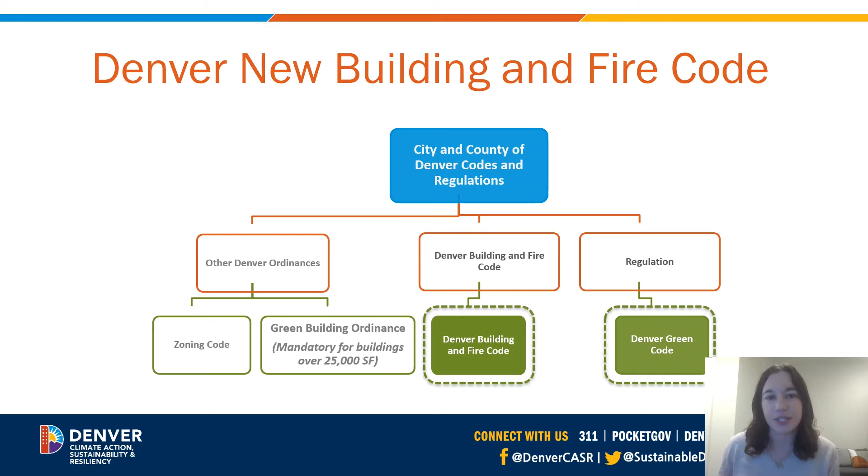Through the end of January to the middle of May, there will be technical advisory committee meetings that will be ongoing to hear and make recommendations to approve or disapprove proposals. Those will be published and be sent to City Council for recommendations of proposals, and there'll be a briefing and a vote. And if that's approved by City Council, then that will create the 2022 Denver Building and Fire Code.

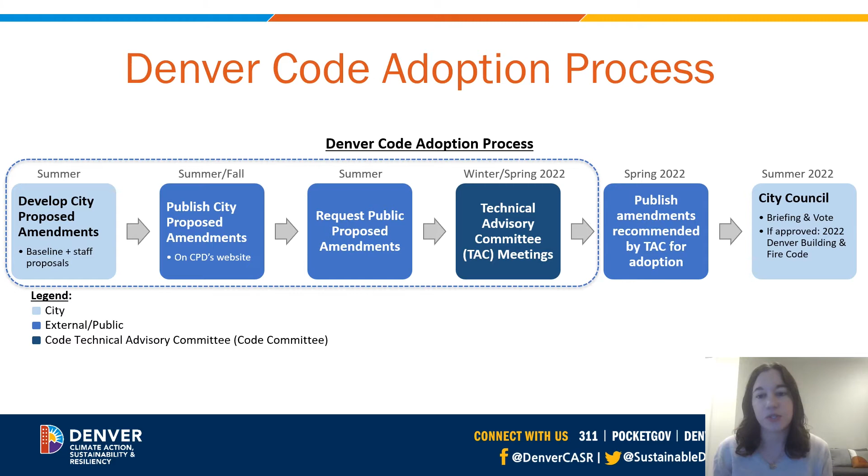For the Code Committee structure, the committee hearings will be with Community Planning and Development. There will be 6 committee hearing series. First one being the International Building Code and International Existing Building Code, the International Fire Code, the International Residential Code, the International Mechanical, Plumbing, and Fuel Gas Code.

And what these briefings will be focused on is the International Energy Conservation Code and the Denver Green Code Energy chapters. That will be one series. And then the Denver Green Code non-energy chapters will be another series. There'll be 15 to 30 voting members of each committee series. NORESCO is Denver's code consultant, and they will be facilitating these meetings.

They are open to the public to listen or to be a proponent or opponent. They will also be following Robert's Rules of Order, where a proponent speaks. Then there'll be speakers in support of the proposal and then speakers in opposition.

Then the committee has a chance to ask questions, where there will be a rebuttal in support and then a rebuttal in opposition. And if necessary, there'll be floor modifications and then eventually getting called to a vote. And the committees will be voting to recommend approvals of proposals. And the agendas for the committee hearings will be posted 5 days ahead of the hearing, and the minutes will be posted 5 days after the hearing.

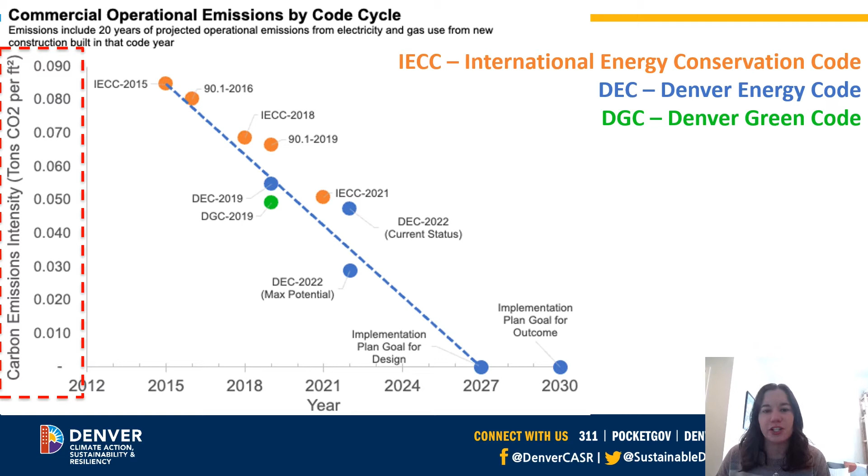Many of you have probably seen a chart like this showing the progression of the various codes and how they compare to Denver's goals. It's based on carbon intensity instead of energy, so the relationship between the codes might look different from similar charts. The carbon is cumulative carbon intensity over a 20-year lifespan, the anticipated average equipment life of new equipment. The carbon intensity takes into account the projected decarbonization of Xcel's electricity grid. This allows us to graph the impact of efficiency, electrification, and renewable energy proposals all on one graph.

This chart includes the ultimate goal for Denver from Denver's Net Zero Energy Implementation Plan. But keep in mind that this is the overarching goal for the actual performance of buildings. But we are talking about the Energy Code, which primarily addresses the design of buildings rather than the actual outcomes. And we know that there's a divide between the Energy Code and the actual performance in buildings. In 2024, Denver will be adopting policies to address actual performance outcomes in buildings in order to bring actual performance into alignment with code expectations.

So the goal is for 2027 code to require net zero energy for design through traditional energy code requirements, and for actual performance to start achieving net zero energy in 2030 through the addition of outcome-based policies to work with the energy code. But always keeping in mind that this is about code vintage. Because of permitting and construction timelines, buildings permitted under the 2022 will continue to be built as late as 2027.

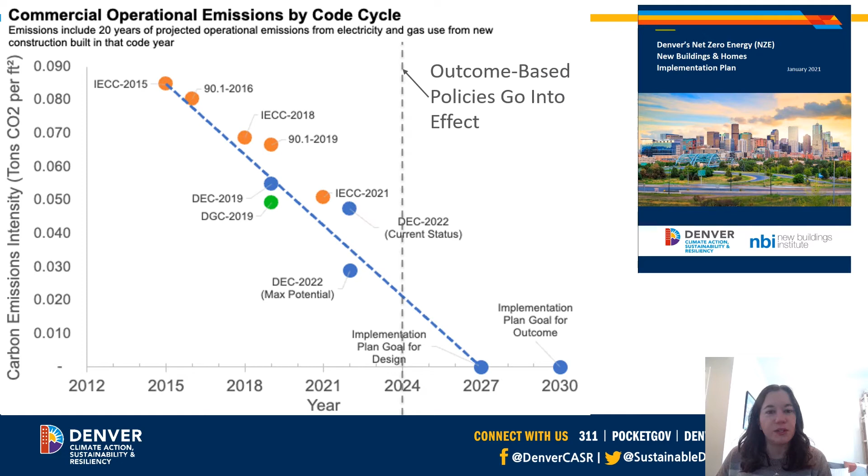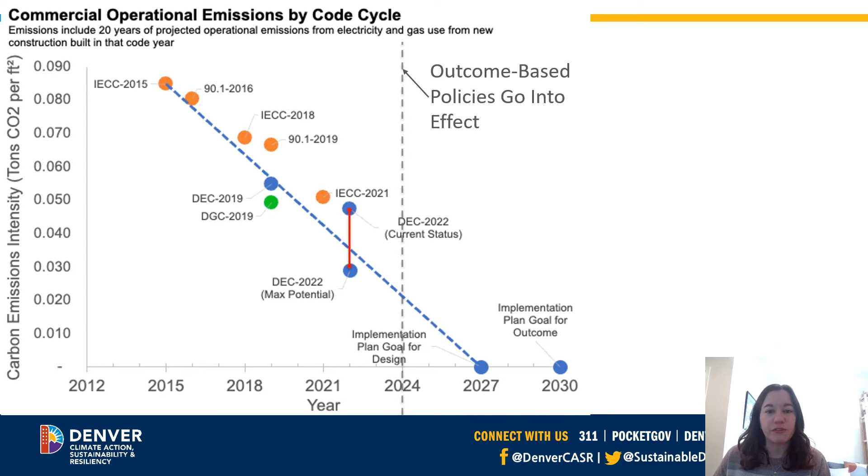This chart includes 2 points for the 2022 Denver Energy Code. One represents the maximum potential of all the proposals that have been proposed, and the other shows where we are with the proposals adopted so far after the first hearing. So we can see that we have the proposals we need to meet Denver's goal. This is all based on estimates of the status of Denver's codes and the impact of the proposals. And some proposals have modeling to support saving potentials, but for most of them, the impact had to be based on best estimates by our consultants, NORESCO and NBI, since hard savings or electrification impact numbers weren't available.

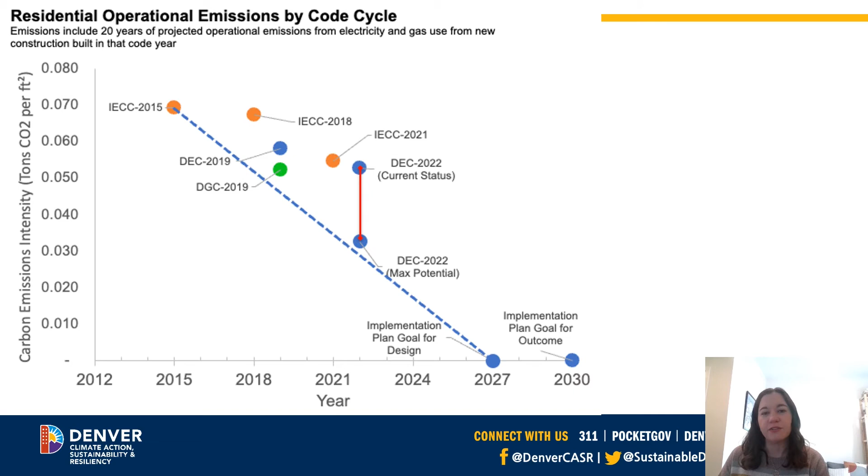When we look at the same chart for residential, we can see that even though the line is not as steep, the national model codes have not made the same kind of progress in the last few code cycles. So Denver residential code has more ground to make up than the commercial code in order to meet Denver's goals. As a consequence, all of the submitted proposals, which include efficiency, electrification, and renewable energy, would not get Denver to its goals unless the proposals are modified to deliver more efficiency, more renewable energy, and full electrification.

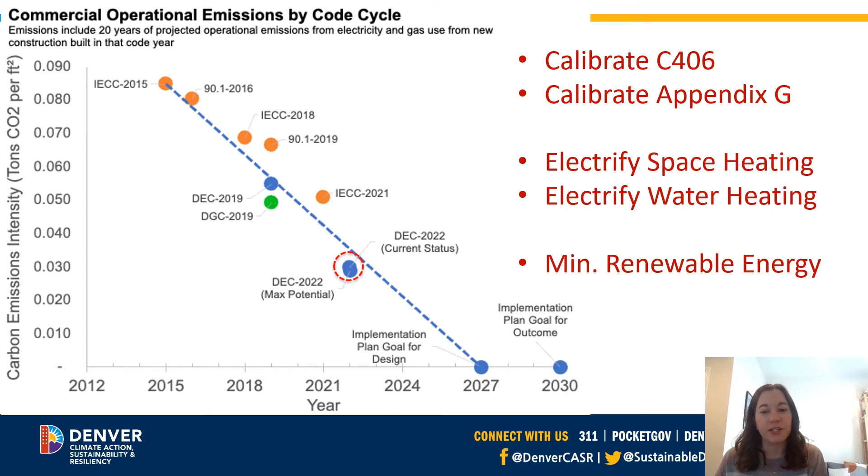This chart demonstrates what the impact of 5 proposals have on achieving Denver's goals. So you can see the Denver Energy Code 2022 current status is nearly on top of the Denver Energy Code 2022 maximum potential, because these 5 proposals represent about 90% of the impact of all of the proposed proposals on the table. So this is for commercial, and the 5 proposals are calibrating C406, which is the prescriptive path, calibrating Appendix G, which is the modeling path, electrifying space and water heating as 2 different proposals, as well as having a minimum renewable energy proposal.

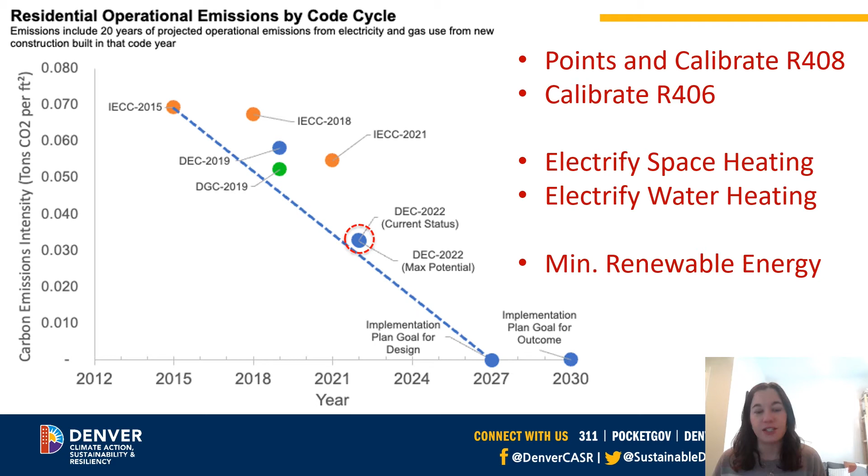And this story is very similar for the residential impact. So you can see that the current status and the maximum potential, again, are nearly on top of each other, because these 5 proposals for residential represent about 90% of the impact of all proposals on the table. So it's similar where it's calibrating the R408, which is the prescriptive path, R406, which is the modeling path, electrifying space and water heating, and again, minimum renewable energy requirements.

So last time we reviewed what proposals have passed in the IECC and Denver Green Code energy hearings. The column on the left is what we've already reviewed together. The column on the right, those are the proposals with updated status since hearing number 4.

So number P45, a change in occupancy, was approved with the intent to modify. Number 23, general prescriptive path, approved with the intent to modify. Number 7, duct and air handler locations, was approved. Number 46, duct testing, was approved as modified. And number 11.2, continuously burning pilot lights, was also approved. And again, when they're approved, it's recommended to be approved to City Council. So thank you.

So for the structure of the IECC and Denver Green Code Energy hearing number 5, we will be doing an introduction as well as a voting section. Like previous hearings, we will have an introduction section where we're introducing 2 out of the top 5 commercial climate impact proposals that we heard in previous slides. We will then be voting on 2 different ones of the top 5 climate impact proposals. And we'll also be voting on others that tie into the 5th of the top 5 commercial climate impact proposals.

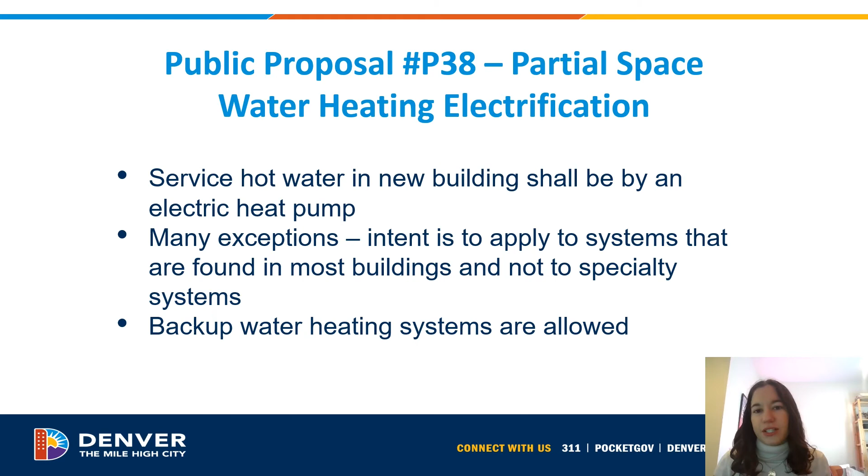Climate change cannot be stopped as long as natural gas is used to heat our buildings and water. In Denver, 97% of buildings' greenhouse gas emissions are used for space heating and hot water heating in our homes and buildings. And Xcel Energy's electrical grid in Colorado is getting dramatically cleaner and will be at least 80% renewable by 2030, which is during the lifetime of any space heating equipment installed now, making electric heat pumps the option with the lowest greenhouse gas emissions available today. Electric heat pumps are also 3 times more energy efficient than their gas counterparts. We will go into many more details during the hearings, so please review the proposals on the 2022 Denver Building Code and Denver Green Code adoption website.

Public proposal number P40, also submitted by SWEEP, is very similar to the last proposal, but is about space heating. So this proposal would require heat pumps for space heating systems in new buildings. Again, there are many exceptions, and the intent is this would apply to common systems found in most building types. Heat pumps use electricity to move heat from a cool space to a warm space, making the cool space cooler and the warm space warmer. Cold climate heat pumps work well in Denver's winter climate, heat pump technology has improved significantly in recent years, and they operate well down to -12 degrees Fahrenheit.

New buildings need to stay ahead of existing buildings. The Energize Denver ordinance applies to commercial and multifamily buildings and has energy performance requirements and electrification requirements. For electrification, all buildings will be required to partially electrify space and water heating systems upon system replacement when an electric heat pump is near cost parity with a like-for-like gas system counterpart. So we need to be ahead in new buildings so that these buildings in the future can meet their existing building requirements.

The next proposal is Proposal 4, which is about minimum renewable energy for commercial buildings. This proposal requires commercial buildings to acquire a minimum percentage, 20% of their annual energy consumption, from renewable energy, or to achieve an equivalent amount of performance from Section C406, which we just reviewed, or from an on-site renewable energy resource. The system can be sized prescriptively with a table in C405 or through modeling that determines the actual annual energy usage of the building.

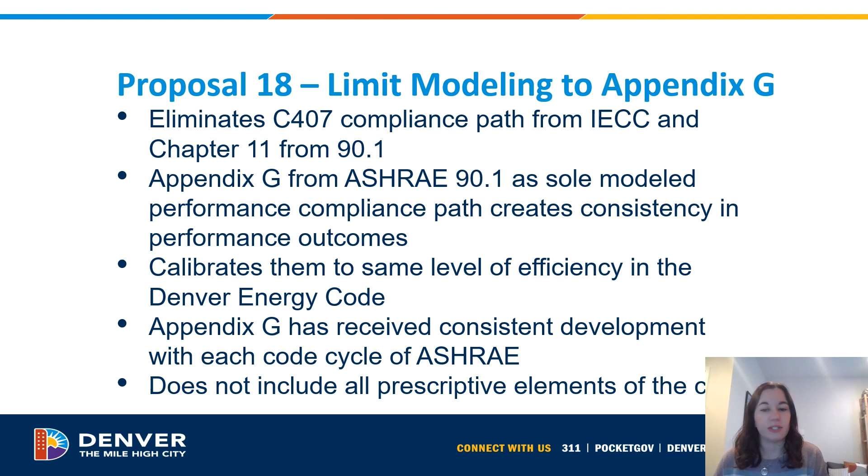The next proposals that will receive a vote relate to proposal number 6 about C406. So as a reminder, number 6 about C406 relates to the prescriptive path for commercial buildings. In the 2021 edition of the IECC, it replaced the C406 package options with credit options. So this proposal calibrates the number of points required by the IECC in C406 to meet Denver's performance goals. It also sets specific targets based on building types in order to allow Denver to move all building types towards Denver's net zero energy goals at a level rate.

It allows the stringency of the prescriptive compliance path to be quickly and easily calibrated to Denver's goals by simply changing the number of points required. And it provides maximum flexibility for projects using the prescriptive path, since project teams will be able to choose which credit options are the most effective and cost-effective for their particular project.

So now we'll get into the proposals that relate to C406, and these will plug in to proposal number 6 about C406. So the first one is number 10, removing a credit limit for premium cooling. So this proposal would remove the cap on possible credits in C406 for higher efficiency cooling equipment, which allows teams to take advantage of very high performance equipment.